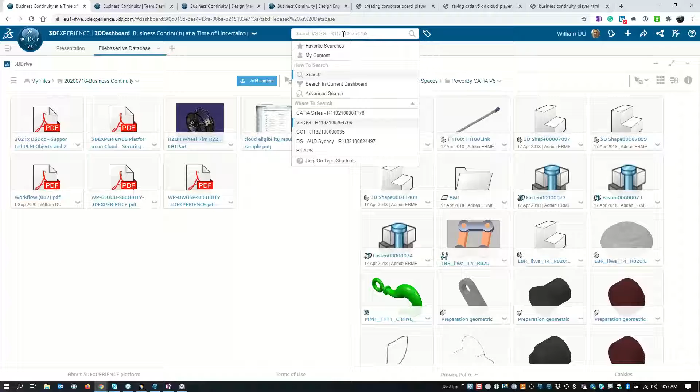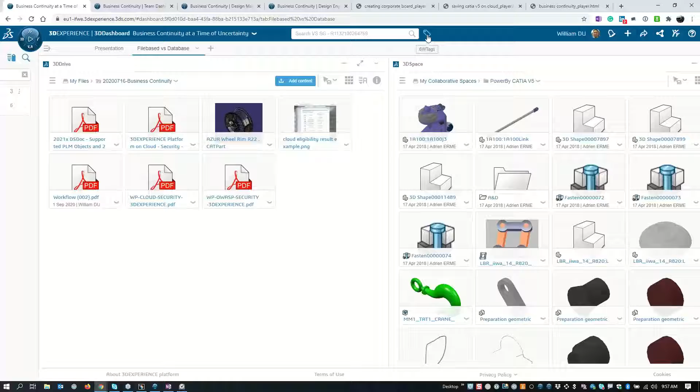I can show you a very simple difference between the two. I'm going to filter my window with just PDFs, and I have two identical PDF files here. I'm selecting one and checking the information, and you'll see that even though it's an identical file, in the 3D drive or file base, it has basic information, most of which is very common in a file manager.

However, if you save it on the database, it starts to have more information or metadata, and we start tracking its life cycle. This is how we manage all the documents inside a collaborative space, whether it's a document, a drawing, or a CAD file.

This is the advantage. This is how we start filtering the granularity of the data. If we can access the data efficiently, and we need the metadata only, we can access that quickly. If we need a visual, that's when we load heavier information.

So the question in your mind might be, how do I load data into the platform? It's very simple—you could simply add the content directly, or drag it in. In the collaborative space you can do the same. And if you're using CATIA or third-party apps, you can basically load it, as I'll show in this video.

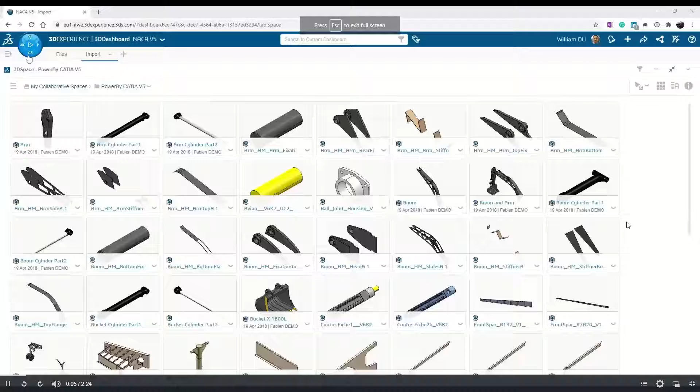Here I'm opening the connector of CATIA V5 in the platform, and it will open a CATIA V5 application in the background. This could be the same if you have SolidWorks or NX—it will load the third party app in the background, and I'm going to open a file.

Here I'm just double-checking that I'm connected to a collaborative space, and I'm now going to open the files that I wanted to load into the platform. So I have a large assembly here.

By the way, this scenario I did here in Manila and at home, so it gives you a good understanding of the performance of loading data into the platform. You can see I made it fast for the sake of time, but I'm putting information here on how it's running in real time.

So here, this is very straightforward. If you work with CATIA V5 files, you understand how much it takes to load a 672 MB file into the platform. It's generally the same performance as working locally, because it is local.

Now I'm going to show you that I'm saving it on the platform. It's basically saying save on the platform. It shows me information on what to save and what not to save, or if I need to filter it, and some information that maybe the files are not being seen locally. Automatically it will create metadata, transfer the files, and it shows here 509 objects being saved in the platform.

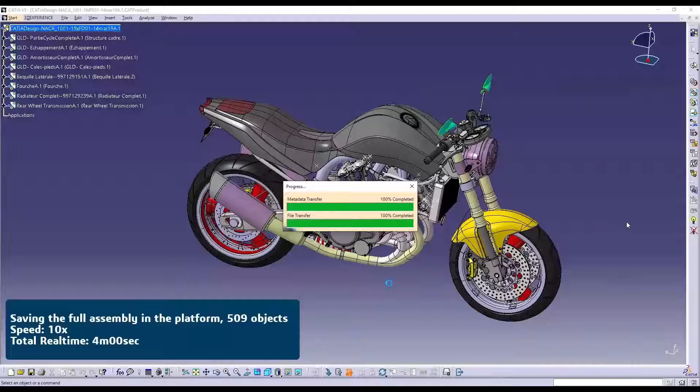Which is a total of 4 minutes. This is about 675 in a file size context, but in the platform we're talking about objects. Okay, so that's how you basically save in the platform.

So coming back here to our scenario, the next thing I want to discuss is an actual scenario I recommend, or show you an actual scenario you could do, which is basically getting a requirement from a customer. I'm talking about two types—in this very simple scenario, I'm going to talk about just two types of persona.

One is a design manager, who takes a customer requirement and communicates that, or creates materials to communicate that with a design engineer, and then assigns that task to the design engineer. The design engineer is going to take it, review the task, do some modification, and then submit it for review. So a very simple task, and I'm going to show you this.

Before I show you that, I'll give you a tour on what dashboards will be shown, or the several dashboards that you could use in your company, for example.

When you come physically to your company, there is a sense of identity that you are inside the company. If you're working from home, it doesn't mean that shouldn't exist. So we recommend you have a company dashboard. I have a company dashboard here, and of course within the company you have your own team, wherein you can put your social tab where you can communicate together, and you have your own personal dashboard as well.

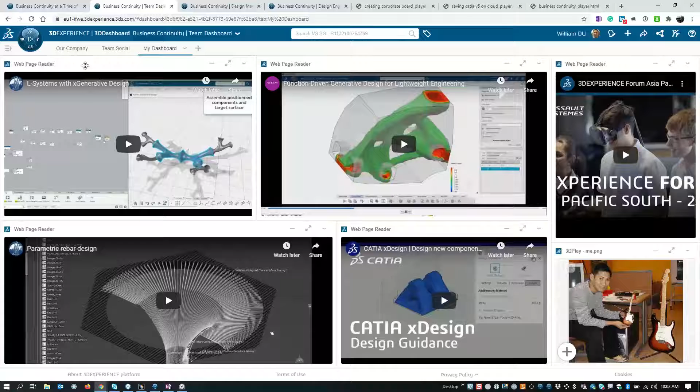For the design manager dashboard, I segregated an external communication section. This could be a community that I'm communicating with from outside, maybe a customer or a different department, and a dashboard where I can manage all the tasks between the engineers. So I have a project planning widget here, and an accumulation of all the things I'm reviewing, or things I'm trying to monitor that the engineers are doing.

Bear in mind that this information is directly from the database, so if my engineer does any update, I will automatically see it once I load this board. That's great - that's live.

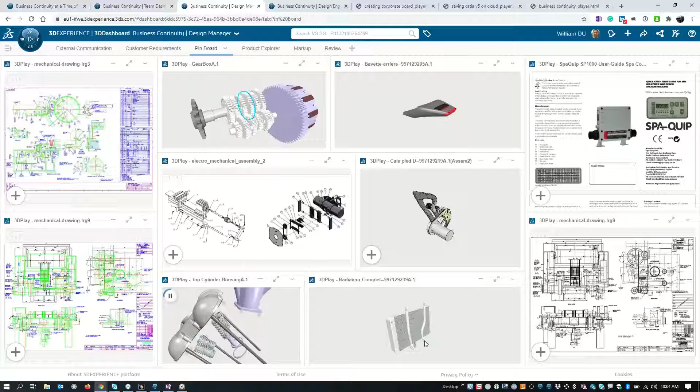So it could be anything - a user manual that I'm studying, or a customer drawing that I'm looking at.

And finally, the design engineer dashboard. I'm taking tasks from my manager. I want to have a view on how much tasks I need to do, and how much I have done - a little bit of my pride board, I would say, of the things I've finished. And that's going to be in the scenario.

So I'm going to play this scenario by showing it in a video. Please watch.

In this scenario, I'm in a design manager dashboard, and I'm opening up a post from a customer telling me that I need to make some changes in the part.

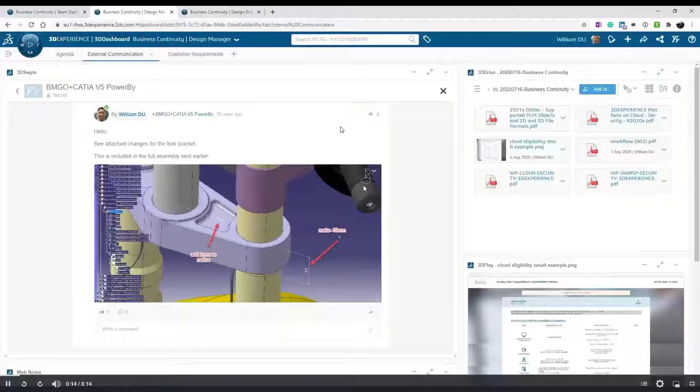From here, I go to my project planning app and start to create tasks, very much like a project planning application. As soon as I create a task here and assign it to somebody, this will automatically be posted on those people's individual task lists.

I can set a basic planning here on how much time each task is going to take. I have full visibility on when it's going to be finished.

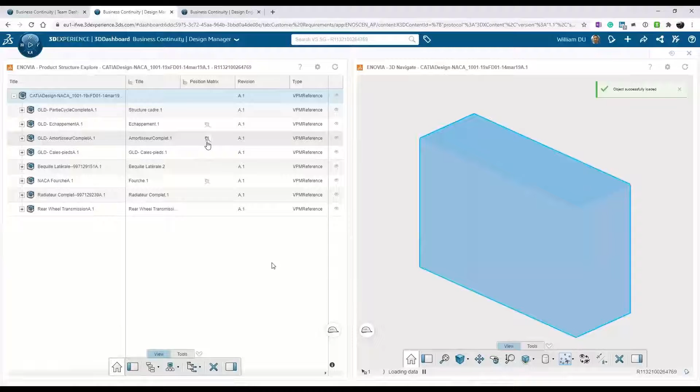Now I'm going to check on the part, or the assembly where the part that I need to modify is in context. I've opened it up in a product structure widget, and I'm viewing the whole assembly. From here, I'm going to search for the part that I need to modify.

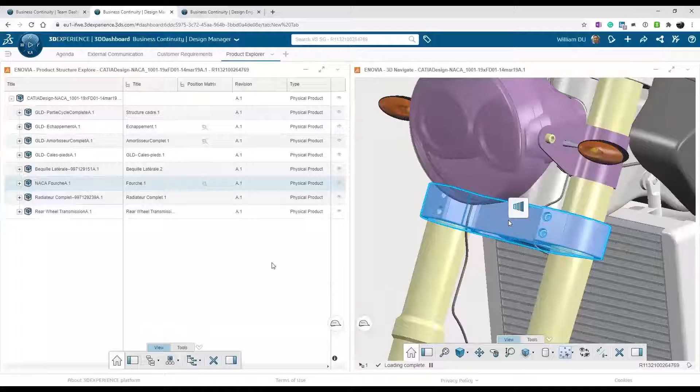So it's basically that bracket. I'm focusing on it, and I'm going to open it in another app, which is what we call the 3D Play app.

I would like to view it and review how I'm going to communicate it with my engineer. From this point, I'm going to convert it into a markup widget, wherein I can start putting notes or annotations that I can communicate with my engineer.

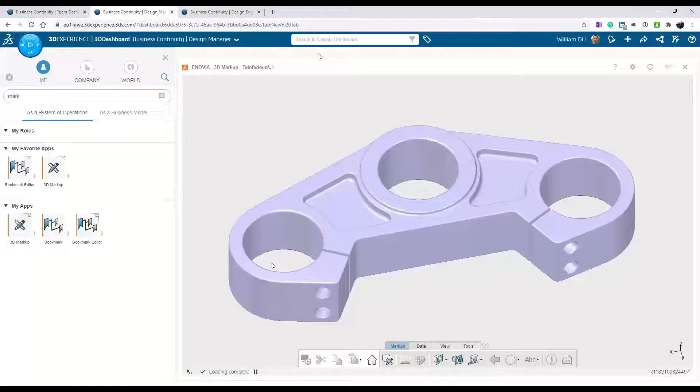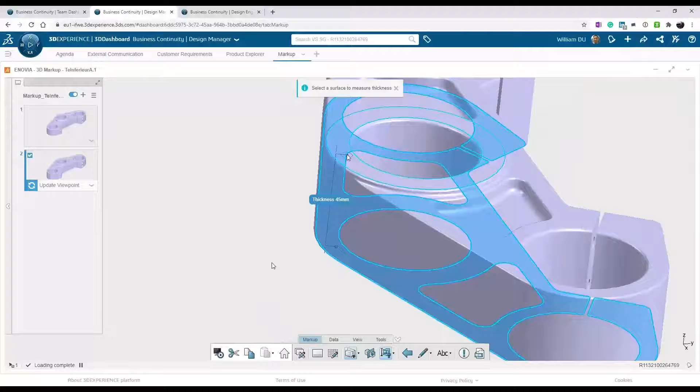This is something you could directly write on the 3D model, create some measurements, reference measurements. So here I've started to create what we call a markup document, wherein there are frames, and I can create several frames to flip through, so it's very clear to the engineer what I am referring to. I'm saying that from this thickness, please - this is the thickness we're talking about - and I want to change it to a certain dimension or in a certain direction.

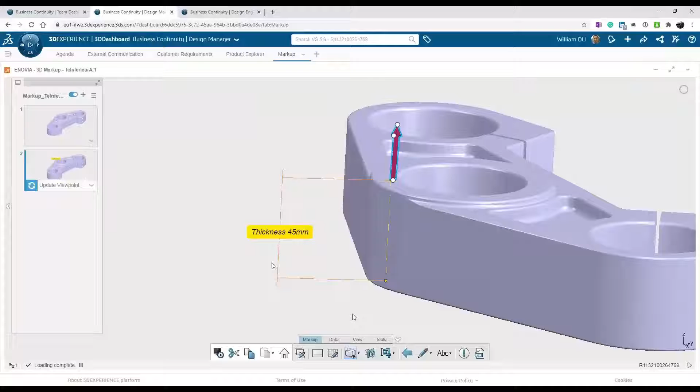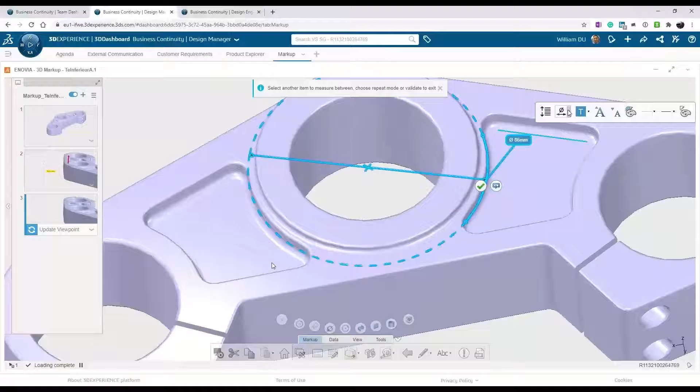Okay, I'm saying here, just add 10 millimeters to this side, and I'm going to update the frame. Then I'm going to create another one. In this case, the customer wants me to increase the space between the flange and the ribs, so add 2 millimeters from this side, and I'm viewing it in presentation mode.

Just to check that everything is in place. Now I'm going to drag this markup into the task itself together with the part, so that when it's assigned to the engineer, he can see both the part and the markup. And I'm assigning the task and completing some tasks in the project planning app.

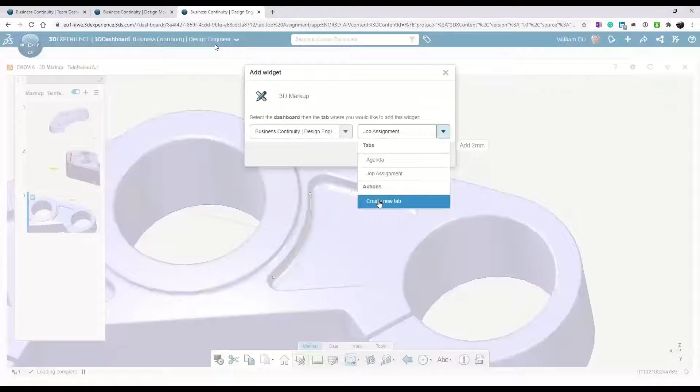Now we're switching to the design engineer. You can see on the top portion here, I received the task from my manager, and I view the markup attached together with that task, and I'm trying to understand what my submission will be for this task. He wants me to change the rib by 2 millimeters and increase the thickness.

So now from here, I'm going to open it from the platform. I'm going to open the part directly from the platform to CATIA. Right now I'm opening the 3D Experience, the V6 CATIA. But you could, if you are a V5 user, open it directly from here, or as a SolidWorks user.

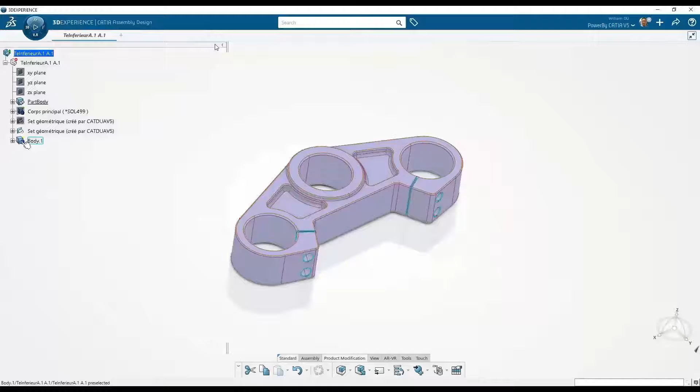You'll notice that this is actually a CATIA V5 part, and it shows in the icon on top that I cannot modify it, or I should not modify it because it's locked. So I'm going to respect that, and what I'm going to do is create another assembly, and put that V5 part into it.

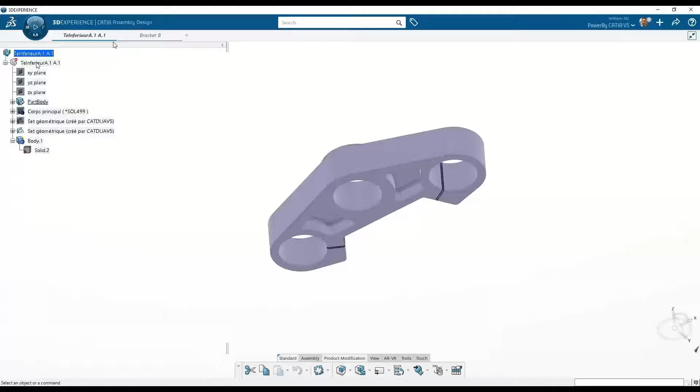Together in this assembly, I'm going to create another part and extract the part body to that V6 part, so that I can start modifying it.

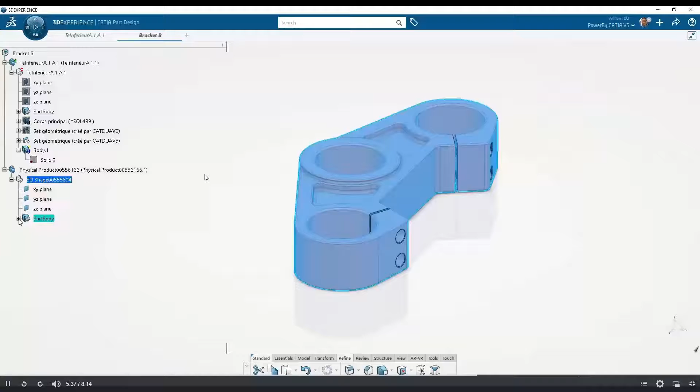Now you'll notice that this is what we call a dumb solid. It could be an STL or STP, which is very common if a supplier or customer gives it to you. So the challenge now is how to modify it.

If I can speak for myself as a design engineer, usually we reverse engineer this first before we do anything, or we do a patch job. But in here, I'm opening it up in a special app, what we call Natural Shape, which automatically recognizes the feature.

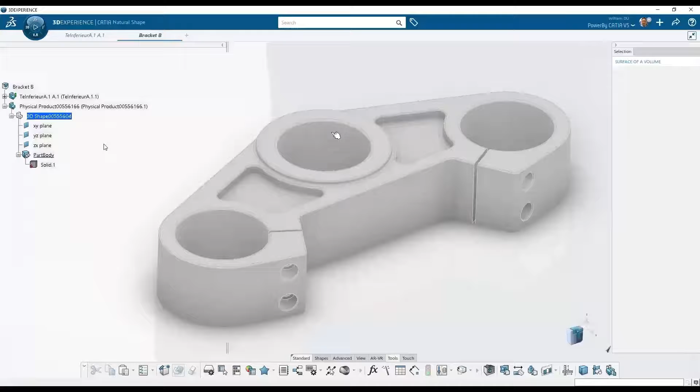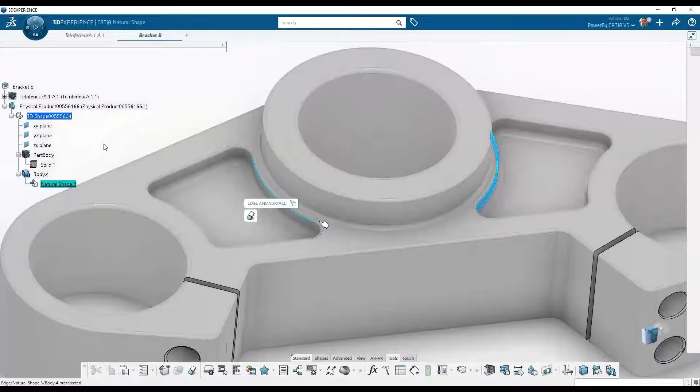I could simply select a surface and drag it, and you'll notice that even the radius and the corners are being kept, because it knows that it's a radius while I'm dragging it. In this case, I'm going to move the surface also, and even the radii are preserved on the corners while I'm doing that. So it's very quick.

With just a few clicks, I'm done with my modification. So now I'm just going to rename this and save it back to the platform. Okay, so I press save, and now I'm back, I'm going to go back to my dashboard.

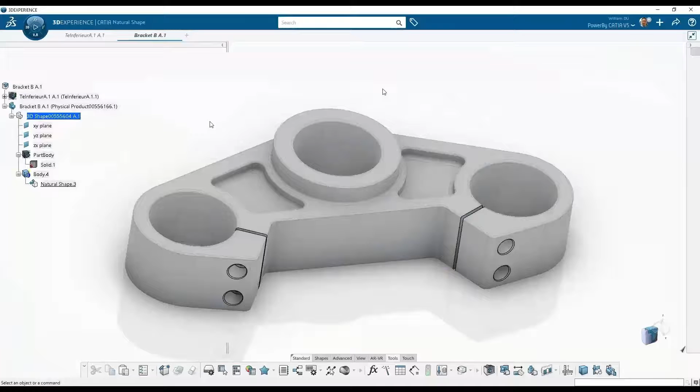And I'm going to say that this part is completed now by attaching the submission or deliverables that I did. In this case, it's bracket B, and I'm going to drag and attach it there and save it.

I'm going to mark it complete, of course, and I'm going to move it to my completed tasks, and go to my next task.

So I'm back now with the design manager, and the design manager noticed that everything is complete. So he takes out the assembly that I made and is reviewing, comparing the old one, the original V5, as compared to the new one. He can view it any way he wants and measure it to verify that all the changes are correct.

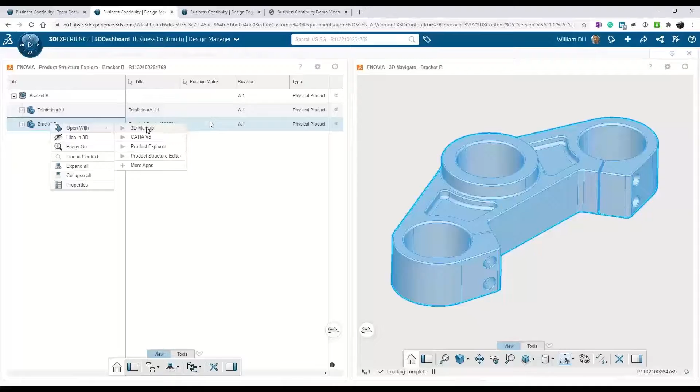And you notice here that he even sees it as complete, so he doesn't have to do anything. He just needs to make sure that it's complete. It's going to flag if it's not complete, but it has a deadline date.

So that's basically how working on the platform works. You don't need to worry, there's an invisible governance happening. Everything is up to date. You're working with a single source of data.

You notice that I never left the platform for any kind of other job, even checking drawings or checking messages or other information. So with that, I hope you enjoyed the demonstration, and I'm giving it back to Paulo.